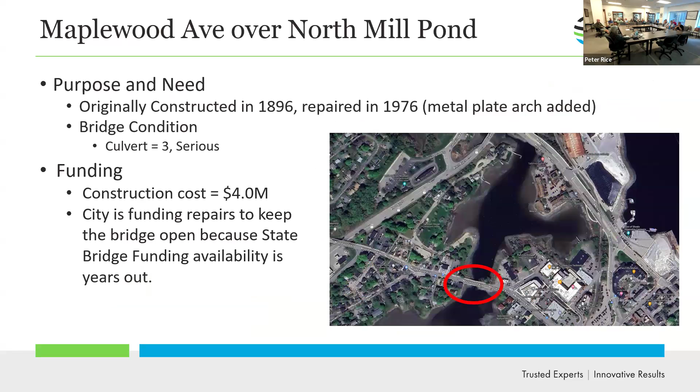So why do we need to do this repair project? The existing bridge has substandard bridge rail that's mounted on rail support slabs, and those are basically very thick concrete sidewalks, to the tune of 16 to 18 inches thick. So it's not just your standard 4-inch thick concrete sidewalk. Those are sloping and tilting as a result of some settlement and other things happening at the bridge that we'll talk about. The project also needs to restabilize portions of existing granite retaining walls that are bulging and having some other distresses.

And then inside the bridge, to address the deteriorated corrugated metal liner that we talked about, we are going to add another liner, more high performance, more high tech, that we'll talk about as well. So a few photos. Yeah, let's talk about what we're actually seeing in the photos.

So the photo on the left is showing the subsidence that we all know about. I mean, if you travel the bridge frequently, you may notice that puddles move around on the bridge. They're not always in the same spot. That is not a good sign. Just putting that out there. The second photo is also showing some subsidence at the marks. You can see that there's some paint marks there.

Catherine and I have been out there for about the last year, kind of monitoring the bridge and seeing how much it's moving around. The photo on the upper right, and actually both photos on the right. So what you're looking at is the remnants of the original sewer pipe that drained the Creek neighborhood, Dennett Street.

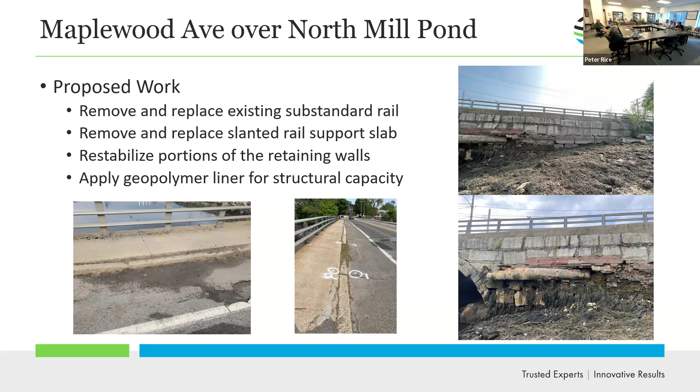So basically what we're looking at is a repair to the bridge to make up for the two attempts to convey sewage across the causeway structure, which is basically what is causing the damage. So we're attempting to repair the original structure in such a way that it'll last 10, 15, maybe a little bit longer years, basically. That's what the intent is here. Excellent. Perfect description, Dave. Thank you.

All right, so now we're looking at a few photos of inside the hydraulic opening. So we're looking at that corrugated metal liner that was installed in 1976. You can see the corrosion throughout. There's areas where that liner is completely 100% section loss or rusted all the way through and material is lost. The photo in the middle shows what Dave was describing, the sewer main that penetrates through that liner and the stone masonry behind that and the voids that exist around that.

So the subsidence in the road above, we are fairly certain that is being caused by the loss of roadway backfill material down through that hole and out into the waterway. The photo on the right shows the heavy marine growth and some of the corrosion in other spots on that liner. So, picture's worth 1,000 words. There's a lot of distress happening here, and there's an urgent need to address the condition of the culvert.

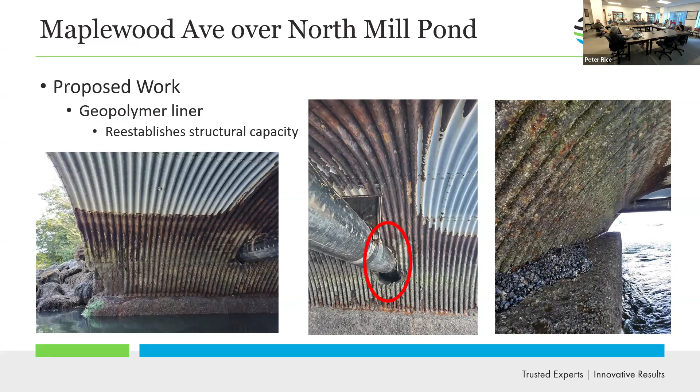So how will we do that? With a geopolymer liner. And this is what I mentioned, the high performance lining material. It's applied similar to how an in-ground pool shotcrete is applied, where it's a combination of air and this geopolymer material, spray applied in several layers to the inside of a liner or a pipe.

So what is a geopolymer liner? I'm going to read you a very technical definition, and then I'll kind of explain what that means. It's a mortar comprised of aluminosilicate powder with an alkali activator to form a monolithic material polymer with ceramic properties. That's a mouthful. Basically, it's a very high performance grout material. It's monolithic, meaning it's not like concrete. It doesn't have aggregate in it. It's sort of continuous material properties throughout, and it's ceramic. So it's very hard and durable, like a ceramic plate.

In the case of this project, the liner thickness is proposed at 4.5 inches thick, so 4.5 inches to all of the metal portion of that liner that we see in the existing structure. And there's a few photos here of this same product, the same repair being applied to a project in Rochester, New Hampshire in 2020.

That's another Hoyle Tanner project, 4-Rod Road over Rickers Brook. This is a very successful project done at a fraction of the cost of replacement and other repair methodologies. So with our experience on that project, we thought this is a great application on Maplewood Ave, taking what we learned on that project and applying it with some other work that we will talk about to repair the project overall.

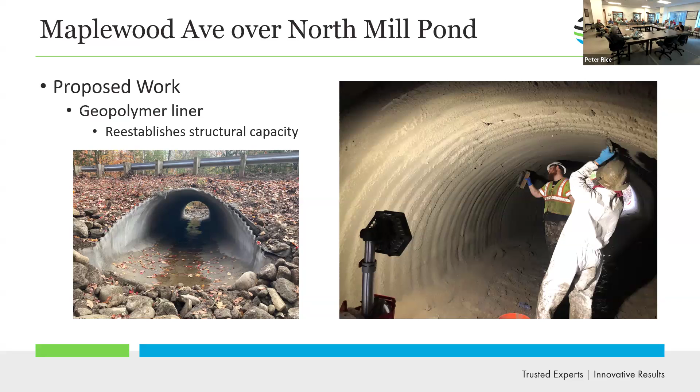The question that I am asked most frequently is how are you going to do that? Anyone that's seen the tidal changes through there and the water flowing through that, it is the biggest challenge of this project. So the overall scheme is to create two cofferdam systems, one on the north side, one on the south, and hydraulically connect the waterways between the north and south with temporary diversion pipes through those cofferdams. Those are sized at a minimum of 48 inches, or pipes that provide an equivalent hydraulic performance to two 48-inch pipes.

Now, this won't convey the entire flow that the existing bridge does, but it allows enough flow such that you have connectivity during each tide cycle and connectivity to allow North Mill Pond to drain when the freshwater inflow events occur. So you can imagine that if you just installed a cofferdam system on the north side, the rest of the Piscataqua River system wouldn't know that you did that.

So you could do that hypothetically, but then all the freshwater inflow that comes into North Mill Pond would be trapped. So we need a way to both connect the aquatic and other aspects of North Mill Pond to marine water, and we also need to let the fresh water out. So that occurs with those twin 48-inch pipes.

We've done extensive hydraulic modeling of this, very complicated 2-dimensional analyses to support this concept. It will work. We've presented this to DES. They understand it and support it. But there's a lot of folks that have a lot of questions about this, and I'm happy to answer more questions, but that's the overall concept.

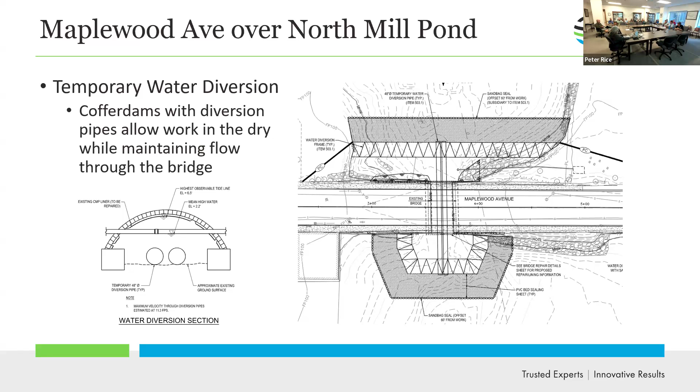So basically, you're gonna put a temporary pipe inside the existing pipe so that the liner can work. Correct. And then we're gonna take it all apart once the liner's in place. Correct. And how long is that gonna be inside the culvert? The overall project duration is 140. Inside the culvert, in theory, the contractor has the entire construction window to work inside, which is 140 calendar days. We'll look at that schedule later. So short answer, it's contractor dependent, and maybe we can let Mike speak to what he thinks.

So the other thing we're gonna do while we have the cofferdam set up is we're gonna do the wall repair where the pipe was sticking out through the wall in the photo. So we're actually gonna take that wall down to below where the damage was and then build the wall back up properly. The granite blocks that they kicked off to the side back in the 20s are still sitting down there on the shore. So we're going to pick them up and put them back into the wall. That's our plan.

Yeah, thanks, Dave. There are a couple different elements of wall work. The major work is in the northwest quadrant that we looked at, where that wall gets completely reconstructed down to the mud line. There's a few other areas where granite was removed previously and brick was installed as part of an anchoring system for an old tide gate system that used to be there. So we'll also take those areas of brick, remove that brick and put the granite back. So aesthetically, there will be some betterments. Those aren't such a structural concern.

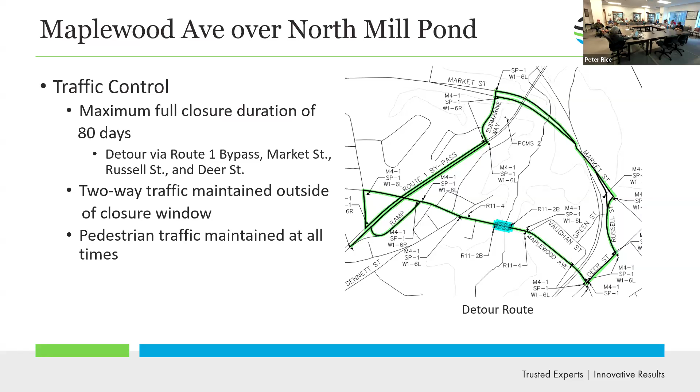It's very important to maintain pedestrian traffic at all times because that detour route is too long for pedestrians. So we will be maintaining pedestrians at all times through the work zone. There may be different ways that happens where the pedestrian walkway gets shifted left or right, but that connectivity will be throughout the project.

So a tentative construction schedule, and we're calling this tentative because even though the contractor's ready to go, our plans are designed, it's been advertised, we know what the cost is going to be, we're still waiting on the environmental permits. It's been a long process and we're at the finish line, but we can't say definitively that it's going to be this week or next week. We know it's soon. So that's the caveat with this entire schedule.

Substantial completion will be in November, and for this project, that's basically everything except for final wearing course pavement and perhaps some vegetation establishment, depending on when the final plantings occur. And we do know there's some bigger tree replanting that has to happen in the spring because the city only plants those big trees in the spring timeframe.

And then in June 2025, we'll come in and do final paving and project closeout. That's one of the city's best practices for these projects: they put the binder course pavement down in the fall, they let it winter over, so any settlement that may occur can occur, and they put the wearing course pavement in at the end. So that is the overall schedule.

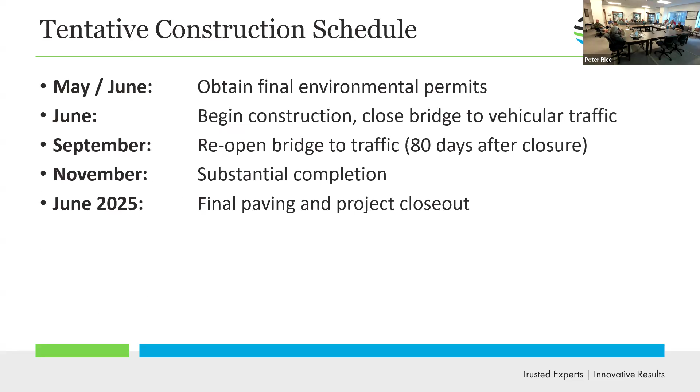So we can move on to the contact information. So project contacts, we hit you with this a couple times, but here's how to get a hold of us. And this will be up on the website. You don't have to scribble everything down. So we ran through everyone here. What I haven't mentioned so far is that there is a project-specific website, and the link is listed there, and we will work with the city to get updates on a regular basis on construction progress.

So a really quick rundown on a fairly involved and complicated repair project. Happy to answer any questions, but we got through the formal part of the presentation anyway.

Yay. Good job. Yeah, thanks for the help.

Okay, questions? Anybody? Yes, sir. You didn't talk about the guardrail. What about the guardrail? He actually did talk about the guardrail, but he used engineer terms, so you probably didn't realize what he was talking about. So in layman's terms, the sidewalk's getting replaced.

The sidewalk is the anchor for the bridge rail. So we're gonna replace the bridge rails and the sidewalks all at the same time, so they're ADA compliant and they're up to code. That's part of this job. Sidewalk. It'll pretty much be exactly where it is now. So all of the existing silver-colored aluminum bridge rail will be replaced with new black powder-coated, crash-compliant, pedestrian-compliant bridge rail.

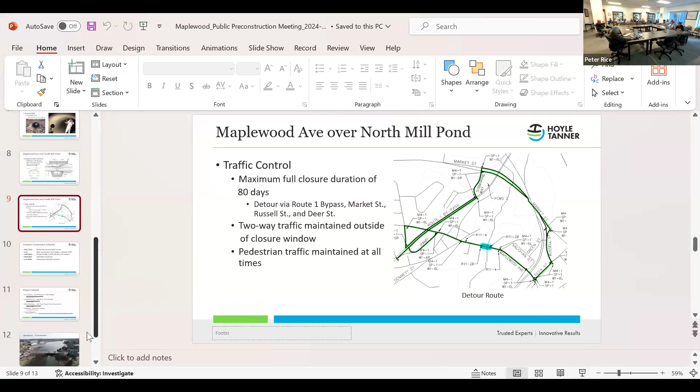So it is big, so you say we're gonna put two conduits, one for the lights, one for Eversource. Eversource actually requires like 20 conduits, but yes. And then one for the light, yes. The main water is in there too, and it's fine, so we're not touching that. And Mike has promised not to hurt it. We'll see.

Good luck. The cofferdam seems very interesting and I would look forward to seeing it. I'm just curious, the flows out of the two pipes that you're putting in, will the flows be the same as currently, or do you expect it to increase? And if so, would it affect the marine life at all? Are you talking about velocity? The velocity is gonna slightly increase because the culvert's a little smaller, so we've taken into account some temporary measures to make sure that there's no erosion happening.

Someone who lives right on the Mill Pond and on Mill Pond Way. Don't hesitate to make it smaller, because the water over the last 2 years is creeping up substantially, and we're noticing problems with that. So unfortunately, we can't do that. We went through an exhaustive hydraulic study of all of North Mill Pond and Hudson Brook and the culvert and the river and everything else you could possibly factor in, to make sure that the liner wasn't gonna cause a problem for anybody.

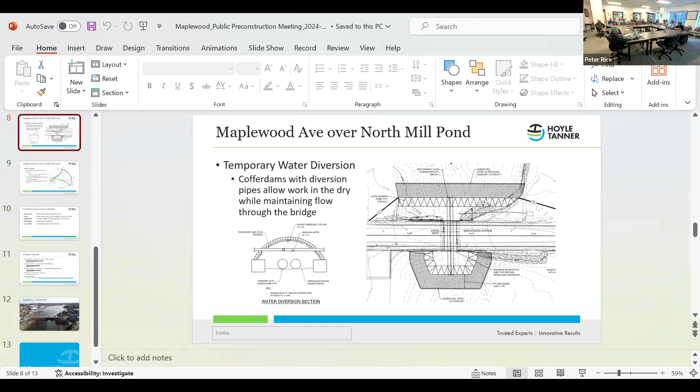Because this is a stream crossing, DES has a whole different set of rules. So when we're done, the causeway culvert will convey the same amount of water, and must, according to state rules. But during construction, North Mill Pond should be lower for a little bit during that closure. So that'll help you in the short term with flooding.

Is there any connection between this project and the commercial project that's going on Maplewood? No, nada, nothing. This is entirely funded by the city of Portsmouth. You good? Anybody else? Anybody on Zoom? Okay. Great. Well, thanks for coming. Oh, okay, one more thing. All right, like Columbo.

Traffic again. So will the bridge be completely closed both ways? From the day they start to the day they reopen it, the bridge is gonna be closed. It's not gonna be open on one side. But once we open the bridge, there'll probably be flaggers during the day when Mike's there. We'll have flaggers on either side and let traffic through one lane at a time, like we do on Islington Street. Be open on one lane once we open it.

So this is an extensive project, but I think it's worth doing. The end goal here is to restore what we had and make it functional for the rest of our generation, anyway. But the sidewalks will be open to pedestrians, and if you want to walk your bike across, you can. We have one more. Okay.